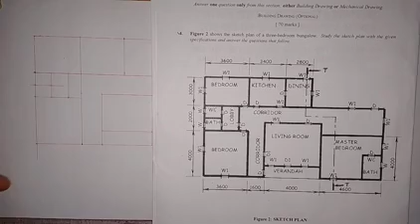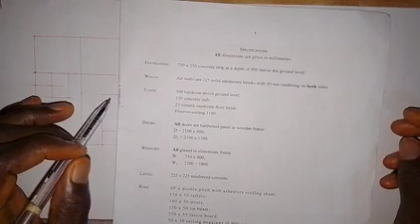Now I want to work out the thickness of the walls of this building drawing, as we have prepared it and as given in the sketch plan. So we want to thicken the wall. That's what we want to do right now. Let's look at the specifications, the details of the walls. All walls are 225 solid sandcrete blocks with 20 millimeters rendering on both sides.

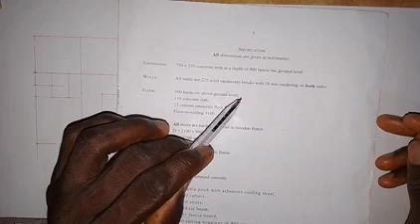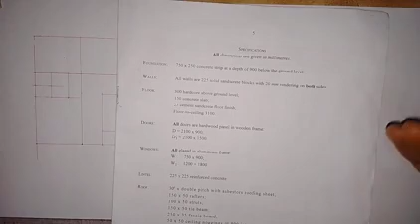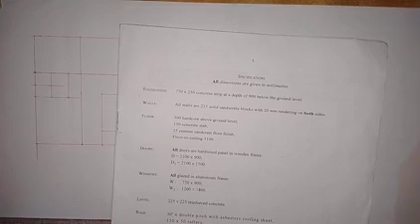So what we have to do now is add this 20 millimeters to the 225, and that gives us 245. We now divide 245 by 100, which is the scale we are given, 1:100. So when we divide 245 by 100, that gives us 2.45. So the thickness of the wall is 2 millimeters.

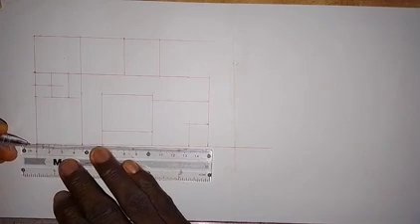So we go on now to thicken the wall. We start from this vertical line and take 2 millimeters inward. So this is 2 millimeters here. Then coming up here, we take 2 millimeters. This is 2 millimeters. Then we join them together to bring out the thickness of this wall. So it goes like this.

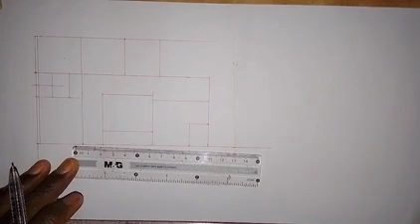Alright, that is done. Then for this wall that we have here, we can take the thickness inward or outward. But let's look at it. There's no wall here. So this one that I put here, I'm not going to thicken it. I'll only take this one and this one that we have here. Supposing I'm using a pencil, I'll just clean it, but I'm going to leave it like that. But it is not a wall, so let's take note of that.

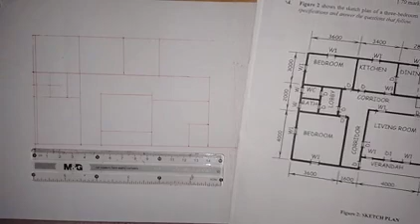So what I'm going to do now is take 2 millimeters, taking it outside here. So here we have 2 millimeters. Coming up here, we also have 2 millimeters. Then we join together.

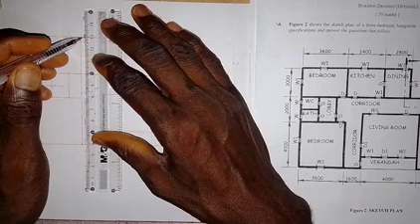I'll just take this from here, and then take this down and stop it here. So here I'm going to... alright, so we have it there.

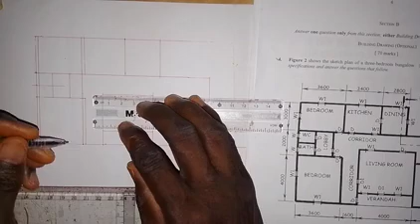So next is for this particular wall. We are working on the vertical ones first. So we take 2 millimeters in here, and coming up here we take 2 millimeters. Then we join this together.

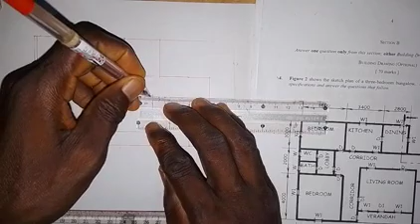So we have taken this wall, and then we also have another one here. I'll take it inward, into the living room. So this is 2 millimeters, and coming up here we also have 2 millimeters. Then we join this together.

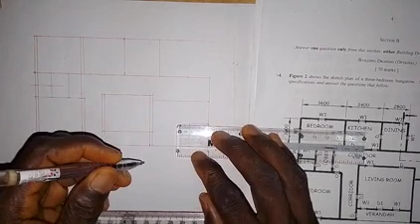Alright, so we have taken that wall, and then we also have one short wall here. So this is 2 millimeters inward. So 2 millimeters here. So we join this together.

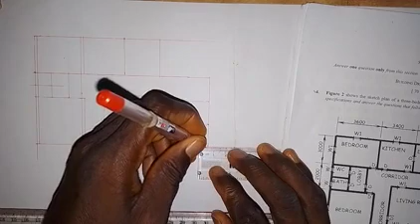And then for this, we take 2 millimeters in here, and then coming up here we take 2 millimeters again. Then we join them together to make the thickness of the wall. So here we have this.

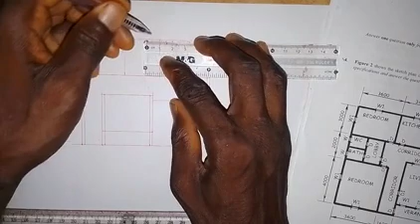Alright, then we also have for this wall, 2 millimeters inward, and coming up here we also take 2 millimeters. Then we join this together.

And then we come here. We take 2 millimeters inward, coming up we take 2 millimeters. Then we join together.

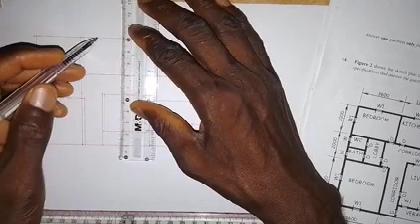Alright, I'm going to pause the video, then do the rest. You've seen the ones I did, so I'm just going to repeat the same thing for the remaining horizontal and vertical walls. When I'm done, I'll come back and we'll do the next thing.

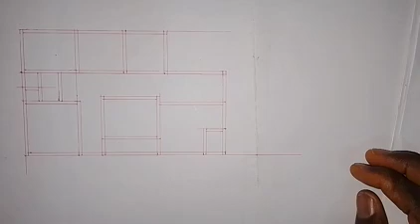Alright, so we have taken all the walls, as you can see here. The next thing we are going to do is fix the windows. You can see we are taking it step by step. So let's look at these details of the windows, as we have them all glazed in aluminium frame.

We have two types of windows: W, which is 750 by 900, and W1, which is 1200 by 1800. This is the width for W, and this is the width for W1.

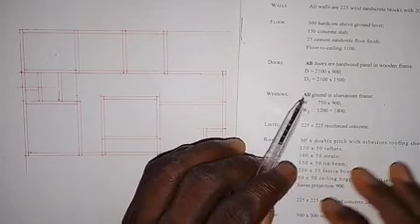So let's fix the window. We come back here. For W1, we have 1200. Most of the windows are W1, except the ones in the water closet and bath. So we come here.

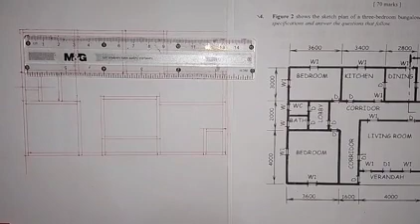When you have to fix the windows, you try as much as possible to centralize it, placing it in the center, in the middle. So I'm setting it here, looking at it so I'm at the midpoint. You don't have to measure it exactly, just use your eyes to place it.

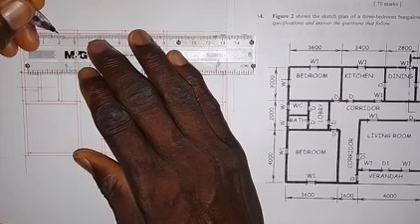So this is 12 millimeters, the width is 12 millimeters. We draw this and draw this. We also have another one here, also 12 millimeters.

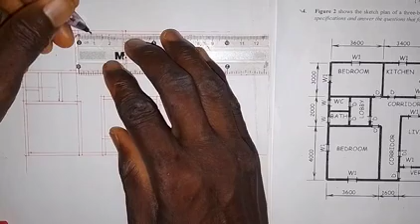Alright, I'll just leave it like this. This is 12 millimeters. You draw this as a vertical line, just a short vertical line here. We also have another one here, also W1, 12 millimeters in width. Alright, that's 12 millimeters.

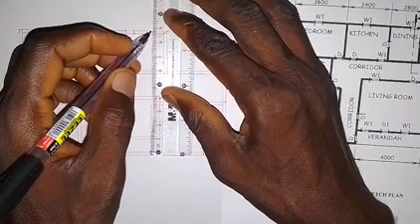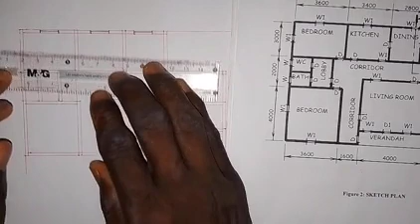So we have fixed the windows here. We need to make sure we put the symbol there for the window, so just set and draw the horizontal line. Alright, the window is in place there. Now we need to make this line a thick line, and also draw and thicken this one. Alright, that's done.

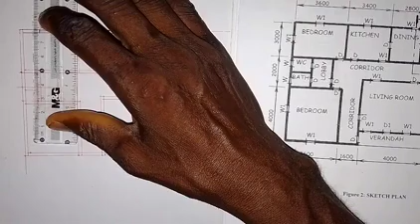So we have fixed the windows here. Now coming here, let's fix the windows here. We also have W1 here, so we fix it here too, trying to place it in the middle of the wall.

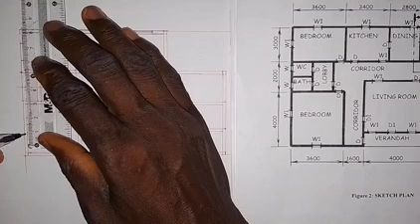Okay, we also have W1 here, and here we have W1, that's 12 millimeters. And here we have WC here — this is water closet, and this is bath, as you can see. That is 7.5 millimeters, and as I can see here, so I just...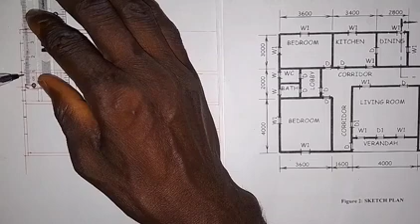I set it here, then here, because looking at what I have there, it's not even up to 7.5 millimeters. Alright, so for this one, I can say I have 7.5 here, so I'll just set it here like this and here.

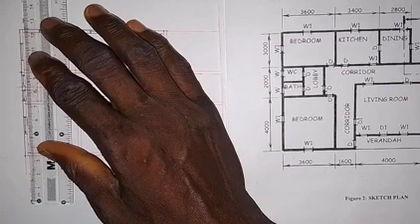Alright, what we need to do now is draw a horizontal line in the middle of this. So we have this, and we have the horizontal line here, here, and here. So we have fixed these windows. Now I need to make this line a thick line, and we thicken it, and also this line needs to be a thick line to this end. Alright, we are done with that part.

So you have seen the ones that I did here and the ones I did here. I'll pause the video, then do the rest, then come back to show you the next thing we have to do after this.

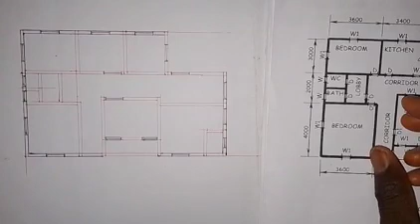Okay, welcome back. We have fixed all the windows, as you can see here, and the next thing we are going to do is fix the doors now. For the doors, we have two types: D, which is 2100 by 900, and D1, which is 2100 by 1500. This D1 is an entrance door that we have here. But before I go for that, let's look at this veranda.

So along this line in the veranda, we have a beam. In the specifications, the beam is mentioned to be 225 by 225 reinforced concrete, 2400 above floor level. This 2400 above floor level will be used in the front elevation, and also in the sectional view.

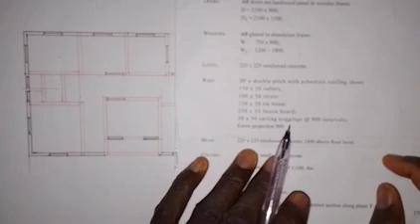But in the floor plan, we are using 225 by 225 here, and this is what we have already done, so you don't have to take any measurement again.

So what we need to do here is show that this is the beam, and that is done with a short dashes line. So just make this a short dashes line. This is how we show the beam in the floor plan. Also make this a short dashes line.

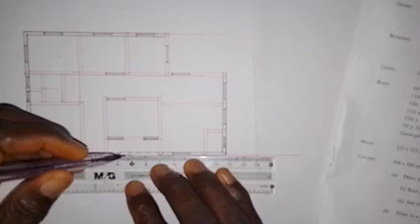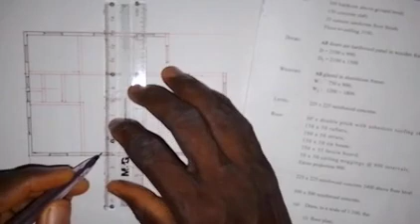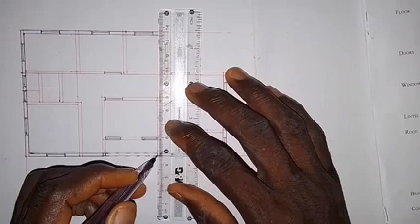Okay, so we have this, and also columns are mentioned. I can't locate any column here, but at this point I can just put it here, this square that I made. So I can see there is a column here. Though it is not shown in the floor plan, I know from experience that you can have a column at this point and at this point, just to reinforce the veranda with the roof. So in that area, I just fix it here like this. Part of it is on the wall, so we just have that part to be strengthened.

All right, so what we want to do is fix the door. So D1, this is where we have D1. That is the door that connects the veranda with the living room. That's where we have D1, and the width we are making use of in this floor plan is 1500.

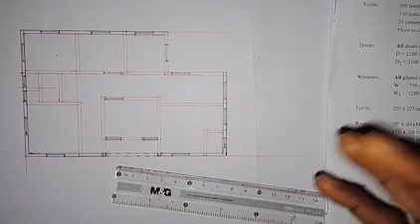I've created it here because even when it comes to this building drawing, there are dimensions that are not workable, so you just have to make sure you are well grounded in this area. There are dimensions that are not workable, so you have to work things out yourself, and that is what I've done here. Because looking at the distance between here and here, they expect me to fix a window.

A window of dimension width 12 millimeters, one here and one here, and they also expect me to put a door of 15 millimeters width here. And I found that if I'm to follow it the way the dimensions are given, it's not going to work.

So let me bring it, look at this window, now look at the way this window is placed, and look at this, how it is placed here. But the distance that we have from here to here is not working as we have here.

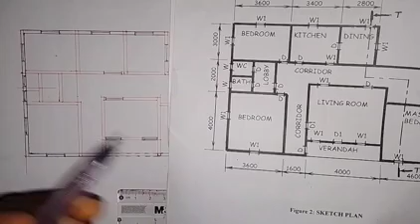For me to fix these windows, let's do the calculation. We have 12 plus 12, giving us 24. Then if I add 15 to 24, that is 39.

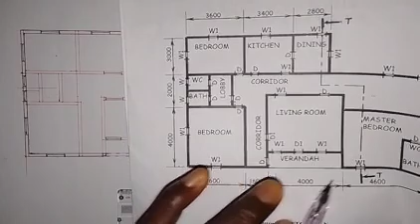And then we have the distance from here to here to be 40 millimeters. So how is that going to work if we are to give space from here to here, space from here to here, space from here to here, and space from here to here? Because they are telling us there should be space between the windows and the doors and the door. So that is not workable.

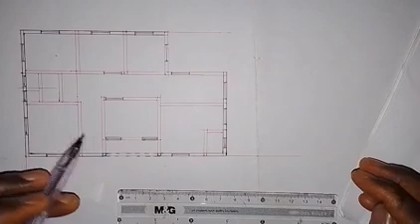So what we just need to do is fix the window here close to this wall, and then fix this one close to this wall. Then what I have here now within this part is just 15 millimeters for me to fix the door. So there are some dimensions that are not workable, so you are the one to work it out yourself. Though when we are marking we don't take measurements, that does not mean you should do what is not okay. So work things out and get it done.

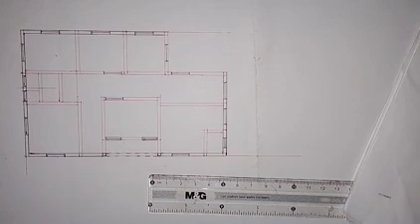Make sure the work is well presentable. Okay, so that is what I just want to say here.

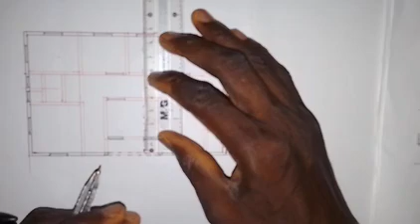Now let's fix that door, which is 15 millimeters in width. It now depends on where you want the door to be open. So where we have to open the door, so which side we want it to be. There's another door here, so you have to take note of that. If I open it to this side, it may obstruct this door. So let's open it to this side.

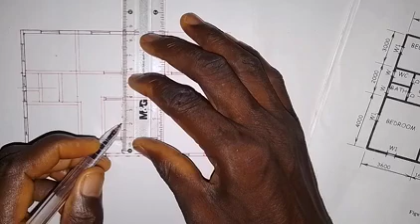So how do we do that? We are going to come to this point and draw a line. I'll make that line 10 millimeters, so we draw this vertical line like this, then we fix here. From this point we draw a line. This is the door, so we open it to this side so that it will not obstruct the door that we have here.

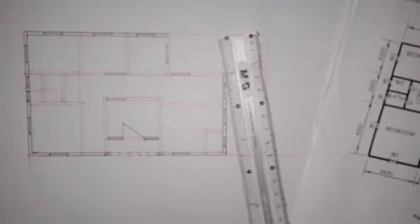We also have a door into the corridor from the living room. That is also D1, which is 15 millimeters in width, so I'll just come here. This is 15 millimeters. So we have it here, I'll just draw a line up like this, and fix it.

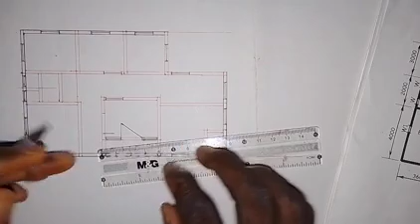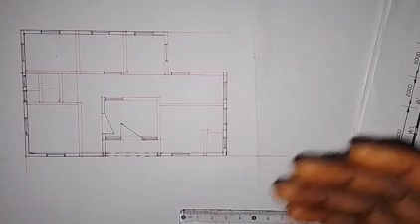Alright, so I will go ahead and fix the other doors, just the way I have done this. When I'm done, you will see what I have done. Let's do it like that to make this video not too long.

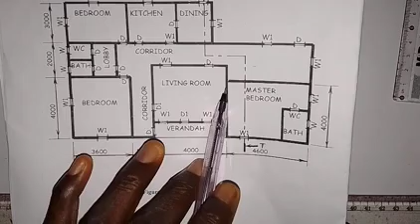Alright, so I've fixed all the doors as you can see here, and I've also lined up the walls as we have here. I noticed that in the given sketch plan they didn't give us a door into the master bedroom. That's an error, so I just created it here myself. So from the living room you can enter into the master bedroom through this door.

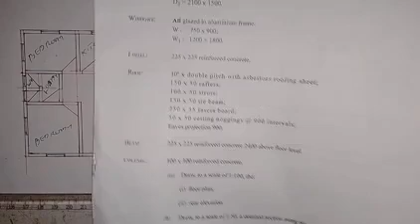Another thing we're going to put here is eaves projection. Eaves projection is given as 900, and eaves projection is the distance between the wall and the end of the ceiling. So 900 divided by 100 will give us 9 millimeters.

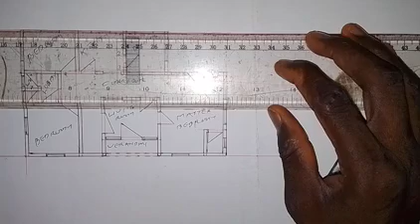So how do we create that? I need to extend this horizontal line. I extend this horizontal line, and I will come here and also extend this horizontal line. Then I need to extend this horizontal line too. Then I'm going to take a measurement of 9 millimeters here. This vertical line I need to take it down a bit. I will take 9 millimeters, so this is 9 millimeters.

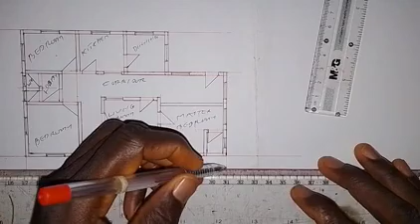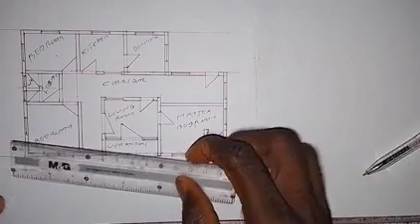Here I will draw a horizontal line, but let me draw what we need. The eaves projection is shown with a short dashes line like this, so it goes like this. Alright, I will still need to take 9 millimeters here, so here I will take 9 millimeters of wall. This is 9 millimeters.

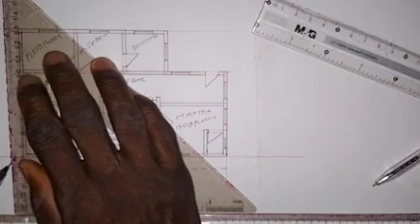I'm going to do the same thing here. So we show dashes line for eave projection. As I said, eave projection is the distance between the end of the wall and the end of the ceiling. I'll just connect it together here. That's it, I will do the rest, and when I'm done, you will see it.